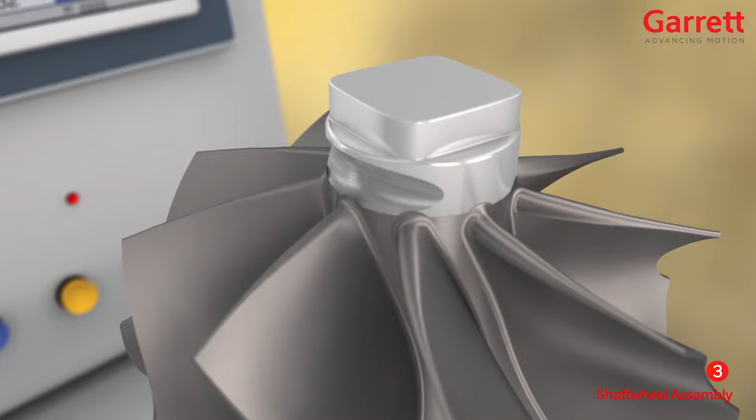Blades are a complex aerodynamic design.

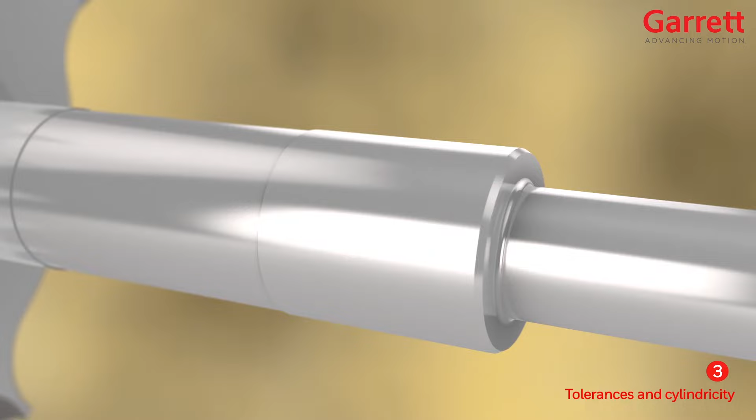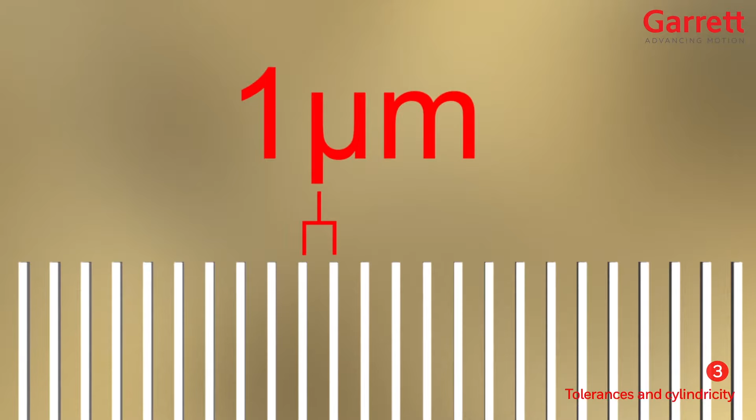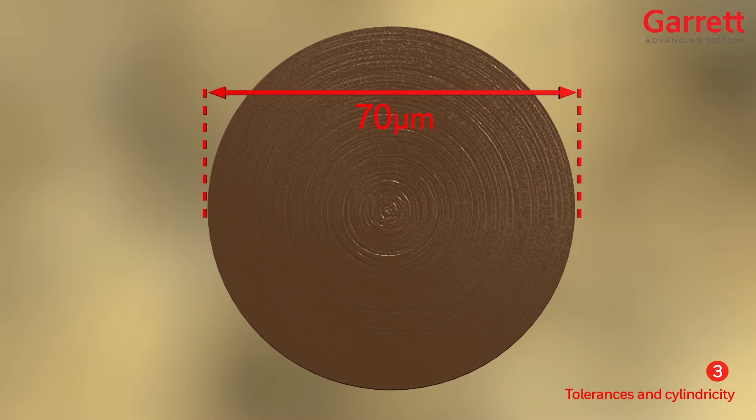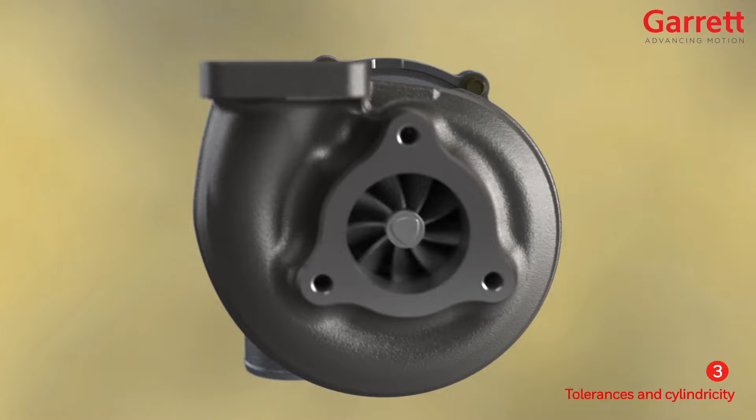For good control of the rotating assembly and reliable, quiet operation, the journals need to be as close as possible to a perfect cylinder. We work in microns, one thousandth of a millimeter. A typical tolerance on that cylindrical shape is just 2.5 microns. To understand these small sizes, we can compare to a human hair, a human blood cell, a particle of dust, and a tobacco smoke particle. We store and assemble these parts in very clean conditions. The new turbocharger must also be installed onto the engine with care, using only fresh, clean oil of the correct type.

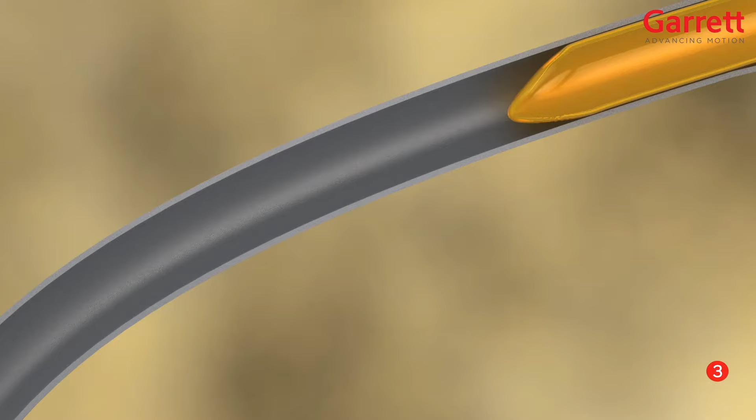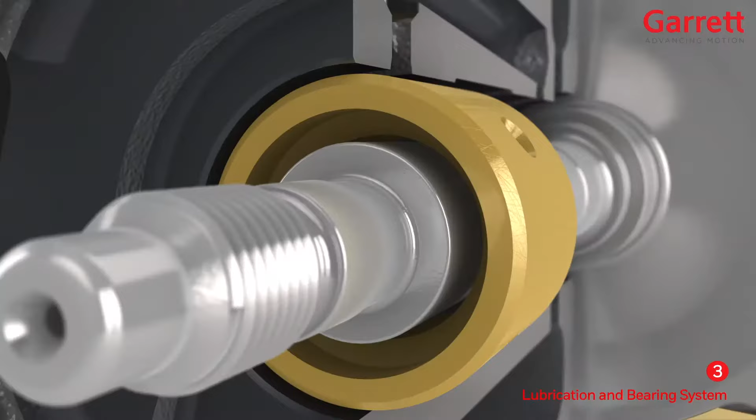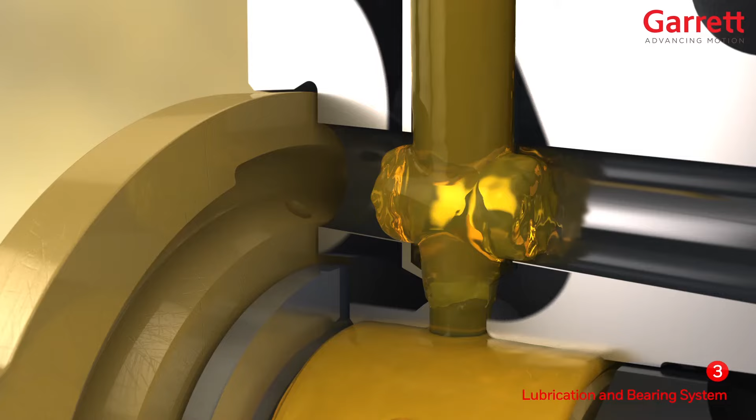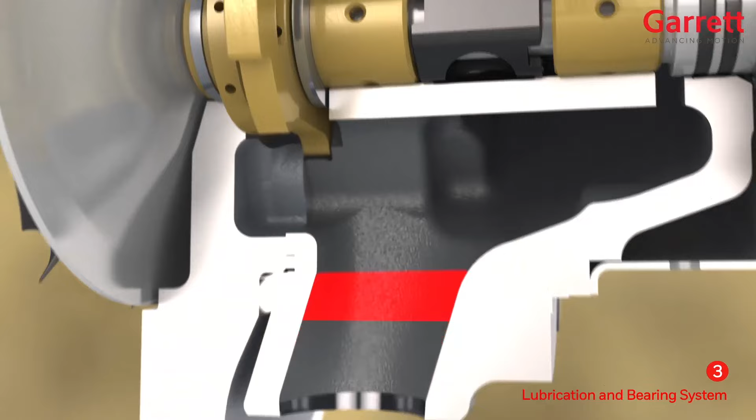Oil from the engine lubrication system enters the turbo and is distributed to the journal and thrust bearings. All turbochargers use two oil films: one between the center housing and journal bearing, and one between the bearing and the shaft. The clearances are often mistaken as excessive play when examining a new dry turbocharger, but this is correct and necessary for proper functioning. The oil flows through both the journal and thrust bearings. Oil throwers at the turbine end and compressor end collect the oil and return it to the engine sump. Notice that the oil inlet is much smaller than the oil drain. Full details of the bearing and oil system will be explained in a later training course.

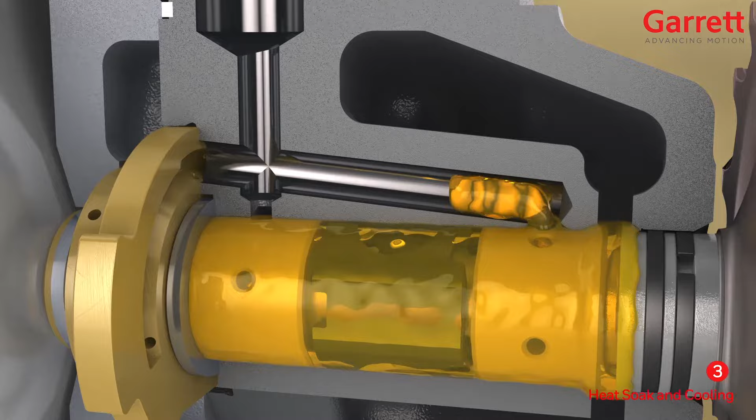The oil also has another important function: to cool the rotating parts and bearing system, preventing damage due to heat soak from the extremely hot turbine end. When the engine and turbo stop, the cooling oil flow stops, and the temperature in the bearing area reaches its maximum approximately two or three minutes later.

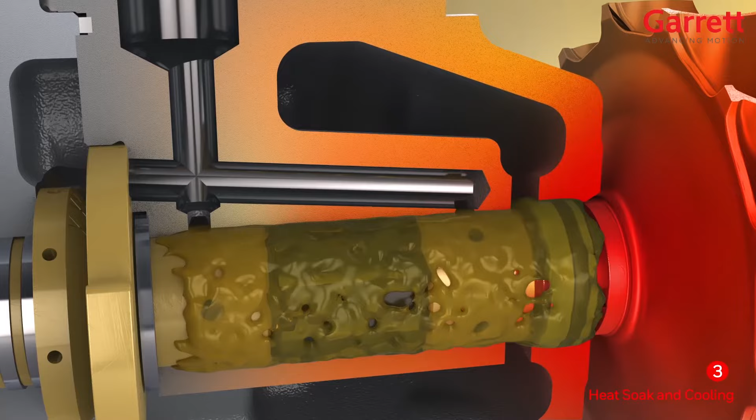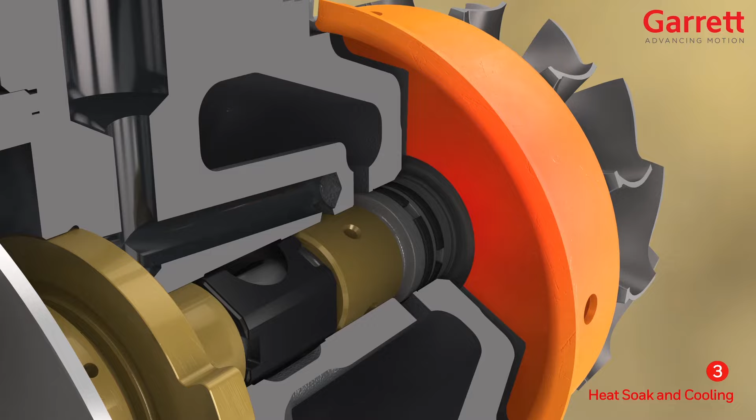If the temperature is excessive, this can cause the residual oil in the bearing to burn and turn to hard black carbon, called coking, which will rapidly damage the turbo. The use of a shroud or heat shield controls heat soak by diverting the path of the high temperature away from the bearing system towards the turbine housing flange, reducing maximum temperature in the bearing area. This simple part is highly effective.

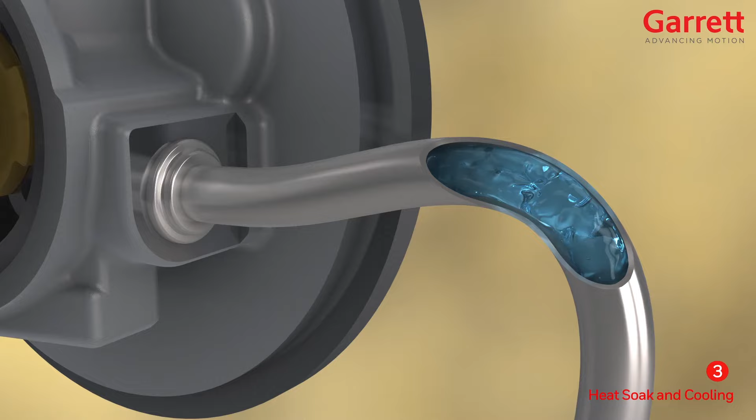But for higher temperature conditions, or where cooling airflow is minimal, we may use water cooling connected to the engine's own cooling system. Even when the engine stops running, the thermosiphon effect of the system continues to cool the turbo.

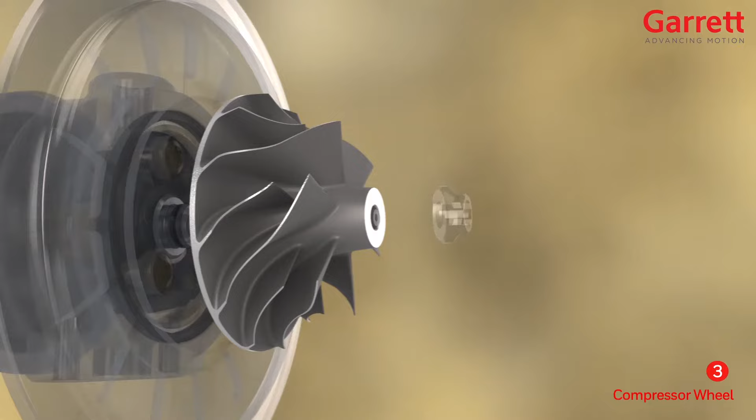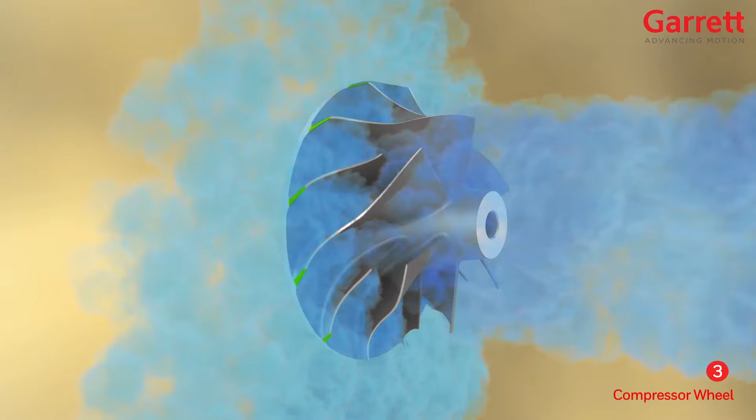Compressor wheels have complex aerodynamic designs, optimizing pressure, flow, and efficiency for each application. Ambient air enters via the inducer and exits at high speed from the exducer section of the blade. Air passages formed between the large main blades are often divided by smaller splitter blades to optimize performance for many applications. The wheel is balanced in two planes, with balance cuts typically on the nose and back disc.

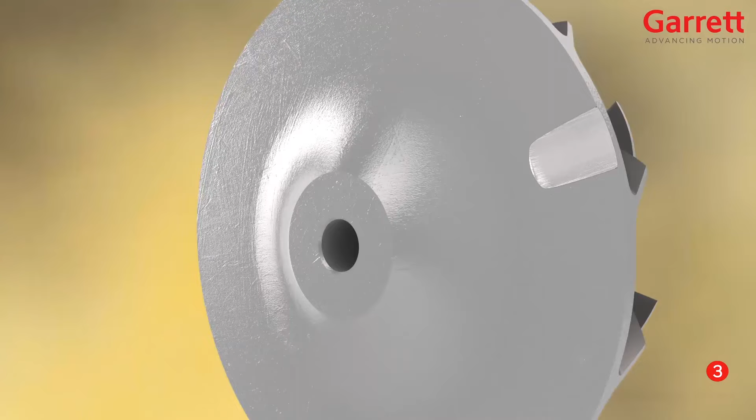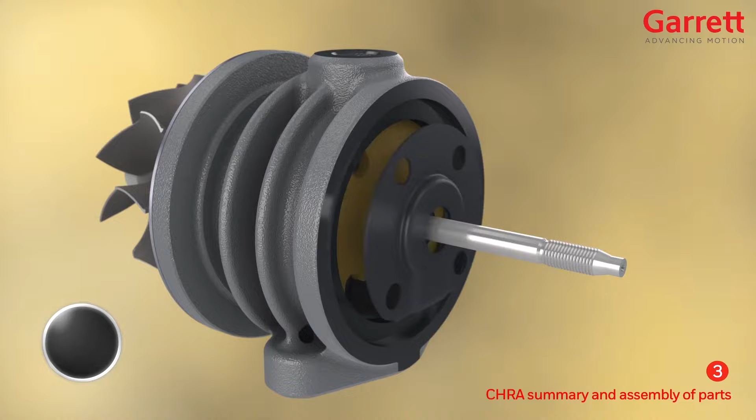All components are then assembled following a tightly controlled process, which includes many poka-yoke devices to help eliminate possible errors of wrong components or incorrect assembly. A red light prevents operators from passing errors forward to the next stage, and green lights indicate a correctly completed process, which then allows the next stage of assembly to continue. The last stage of the assembly process is to correctly tighten the lock nut and test for oil leakage.

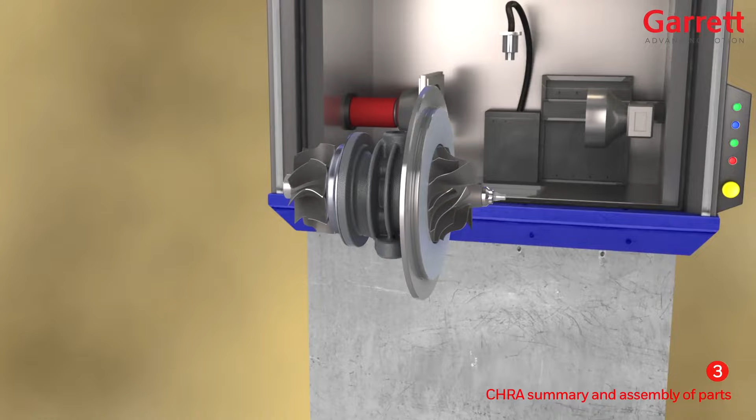Then the CHRA passes into the high-speed VSR machine for a balance check. Any final balance corrections are made at this point, and then the finished CHRA is ready for assembly into a turbocharger.